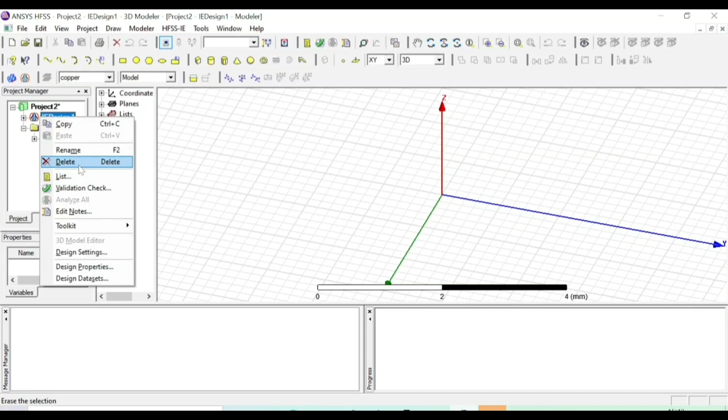We are going to the IE design, which is nothing but can also include some other designing as well. I will not discuss this at present, but this is a little bit advanced topic which I will talk about in a future video. For now, let us start with the normal topic only. Just select this and go to Insert HFSS Design, and a normal thing will appear.

By default, here are the different options. If you observe my previous video closely, you may notice all these tools are in a different order. That's because the main flexibility is that this is the standard order, but you can even change it.

For example, let's say I want this bar at the end. I will select this black line and move it there. That's not all - if I want it placed horizontally, I can do that too. Now let me get it back to how it was.

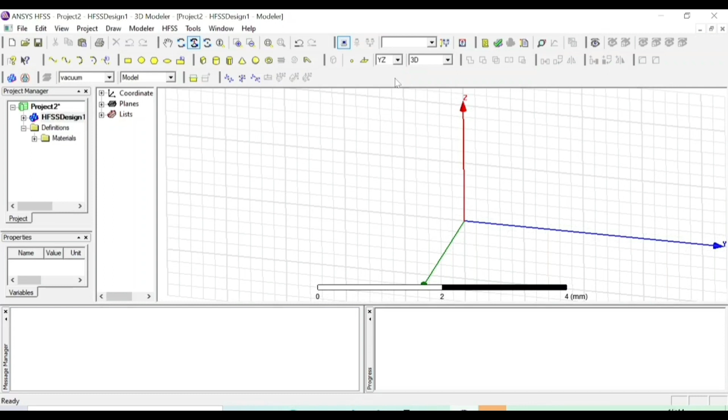As this is in the XY plane, let's say I don't want to design in the XY plane - I want to design in YZ. Just go here and select YZ, and now your base plane will be YZ. If I want the ZX plane, I can use that too. By default, let us keep it in the XY plane.

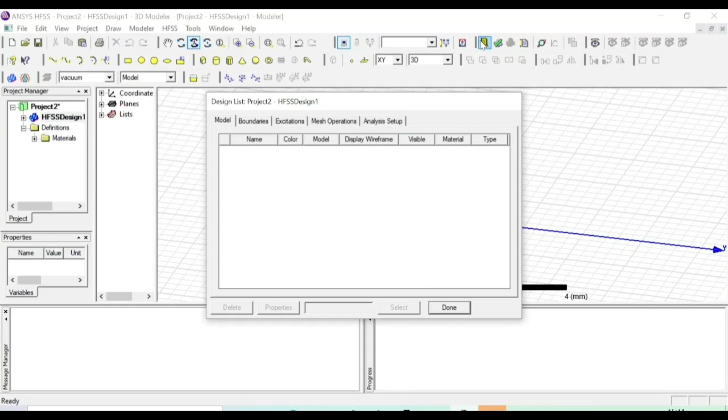Now here there are some things. This is 'list all', which shows all the different kinds of components we use in an antenna, like the ground plane, the substrate, etc. - all of that will be displayed here. This is the validation check, which you've seen me use with parameters, I will explain it afterwards. These are common options.

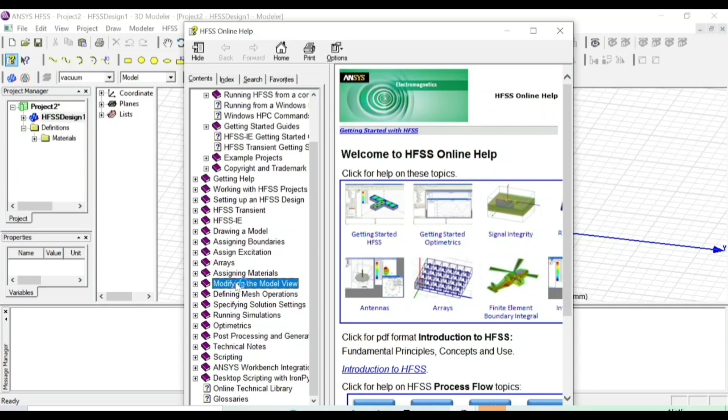Now if you come here, you'll see there's a question mark option. This is help contents - if you click it, it will give you tutorial videos. If you have time, you can open any one of them. For zooming in and out, how you can do it, you can see everything here.

If you want a particular thing, you can just click help on context, and based on that you can get it. Now next to this, these are some of the tools, like you have a line tool.

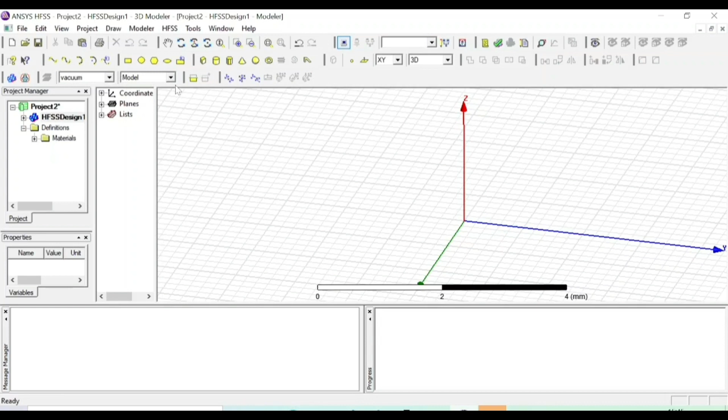Whenever you select anything and you want to deselect, just click escape and it will be deselected. Now, how you draw the rectangle: just select any rectangle. For example, if I want to draw a rectangle, select the starting point, drag it and place it like this.

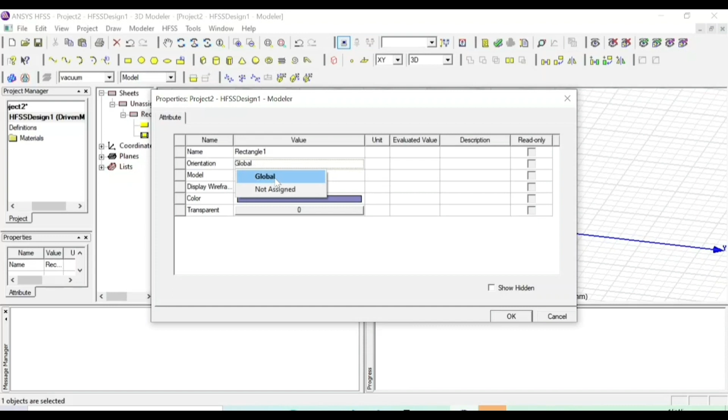Now here it will be displayed. When you double click, you can see here. First of all, it is global. You can leave it as here, or if you want, you can change the name also.

Let me say it as plane 1, let's say. And if you want, you can change the color also.

You have some of the basic colors here. Otherwise, you can select, suppose let us say blue. Then you can select the contrast, how much should be saturated, how much should be illuminate, what is the hue number.

If you want, you can click on add custom colors. You can add your required amount of color also to your thing.

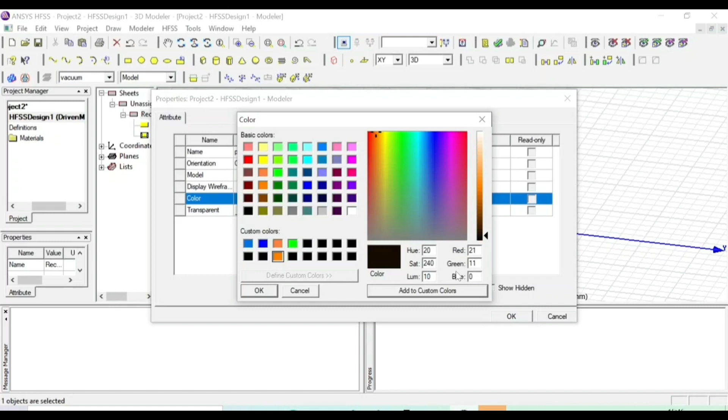Once you are selected, these are the custom colors. Let us say I want orange. Just select this. Let's say I want it to be 150. Okay, just click OK.

Now this is the thing. Now when I click OK, see the orange color is displayed.

Now let's say I want to assign some parameters to it. Just go here, go to plane. You can assign some boundary, you can assign some radiation, you can assign some finite conductivity.

If you want to add an excitation, you can do. You can add a voltage to this. Like, instead of radiation, let us say I want the wave port.

Let us say I am just connecting the supply or current to that. Then I can select the current. If you want selecting an incident wave, you can select that. You can select the different thing.

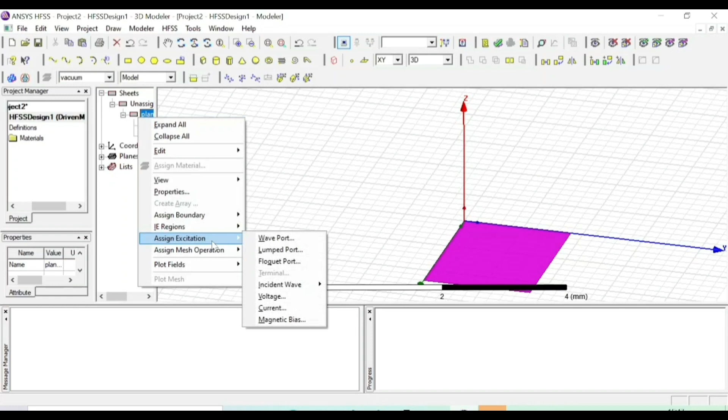Now let's say I want a wave port. Just I will click wave port. Leave the name as default, or if you want, you can change it. Click more, and in the integration line, you can select a new line.

Then by default, whenever you are at the center, you select this. And let's say I want till here, it will be the thing. Then let's click next, click finish.

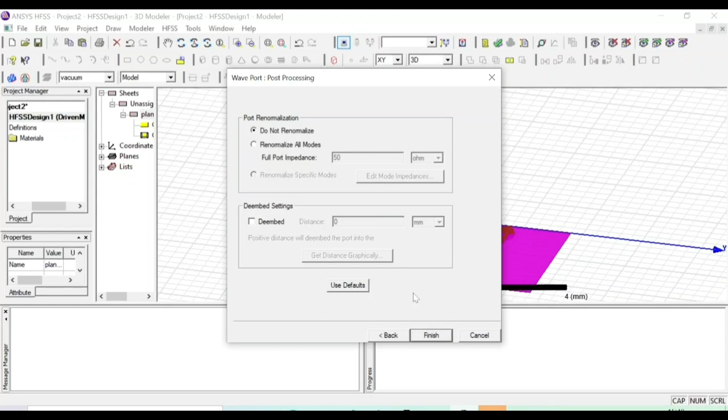Now if you want to see this, just go to here, like press on it, Excitation. See, it will show you the direction. Now by default, whenever it's on, it will be inside. If you want, you can see that. That's the beauty of this.

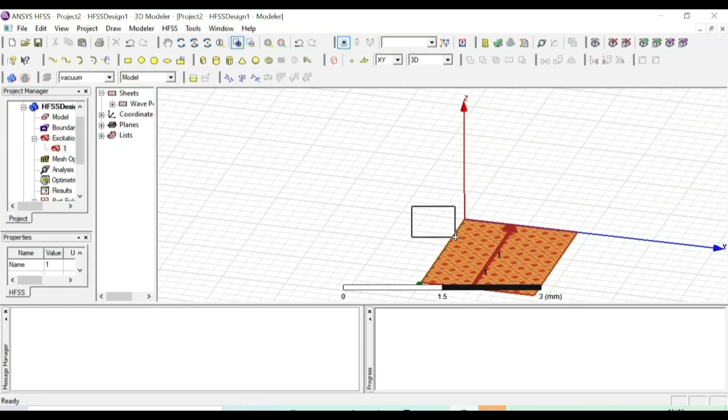Now let's say I want to zoom in. Just click on it, and if I draw like this, it will zoom in. Let's say I want to zoom out. Just click in, you can zoom out.

Now these are the common functions. I hope friends you are gaining a good understanding about the different features.

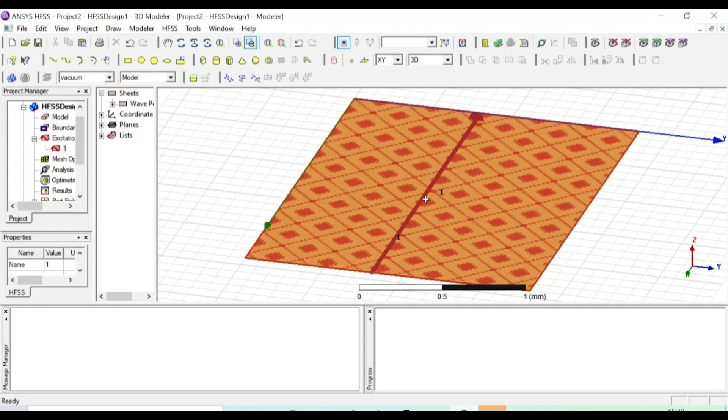Now let me show you how you can create a transparent boundary. Let us say I want to delete this. Just go here, I select this, go to edit, and click delete if you want to delete that. Now yeah, this is the thing.

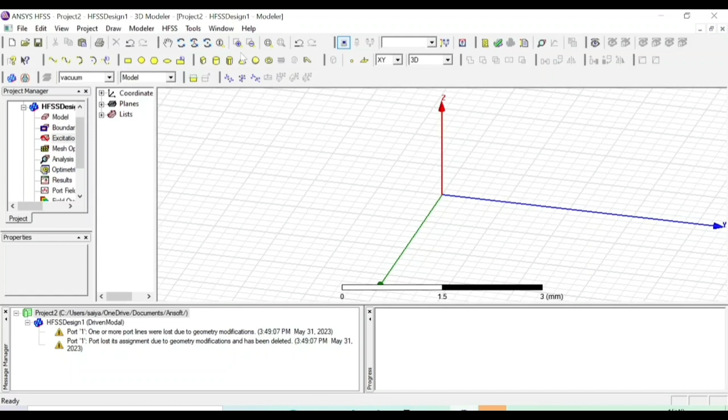Now let's say I have created a cuboid like this. Whenever you are drawing any shape, you should always take care that all its vertices, all its sides should have some finite value. It cannot be zero.

Now let's say I want this box to be transparent. Just go to box, right click on it. This window will appear. Here, if you want, you can select the word.

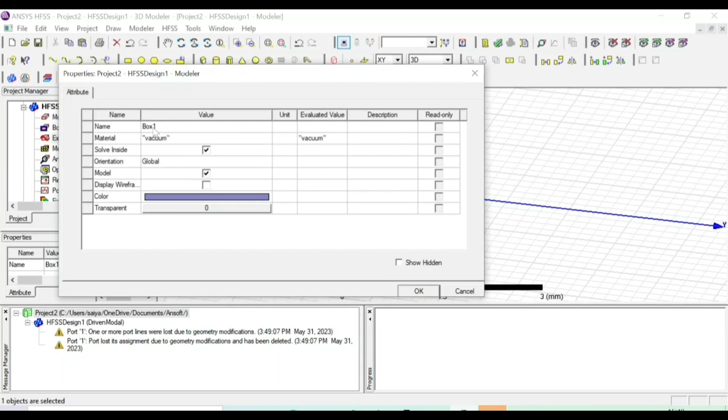If you want to select the material, you can just say edit. You have a ton of different options. Based on your requirement, you can select.

If your substrate is sea water or fresh water, you can select fresh water. If it's tungsten, you can select tungsten. If the common is copper, if you want, you can say copper also. In copper also, you can select this. Just click OK.

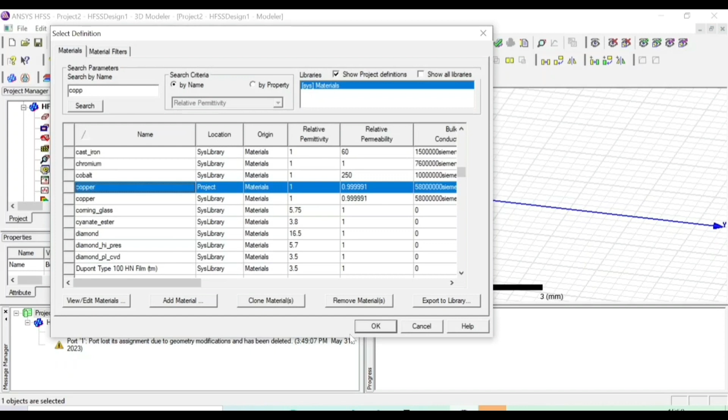Just as you want, you can select the color. Let's say orange. Now the transparency is very important. See, at present it is fully opaque. Let me increase the transparency to 0.4.

Okay, let's say I want the transparency. The moment I am changing the border, you can see how transparent it is. If you want the media to be very transparent, select 0.9 or above. If it is 1, it will be fully transparent. If you want it fully opaque, keep the dial to 0. This transparent parameter takes values from 0 to 1.

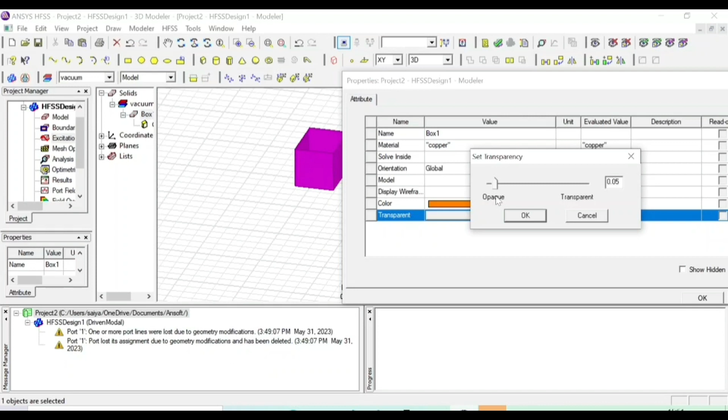Let's say this is fully opaque. Let's say I want a little bit of transparency. The moment I go towards 1, you see the box becoming more and more transparent. Let's say this is the transparency I want. Just click OK, then click OK again. See, the moment I deselected, you see it very transparently.

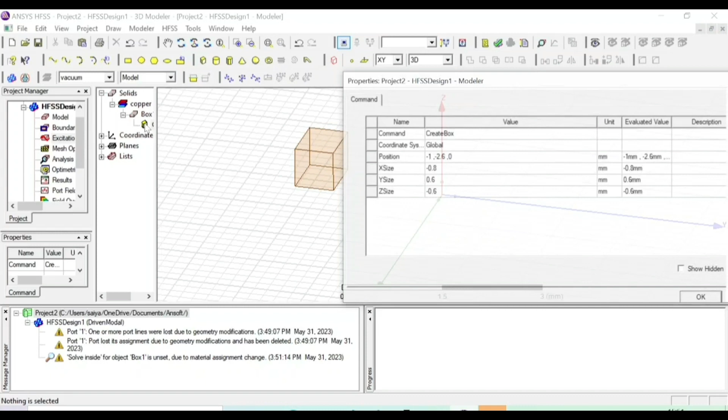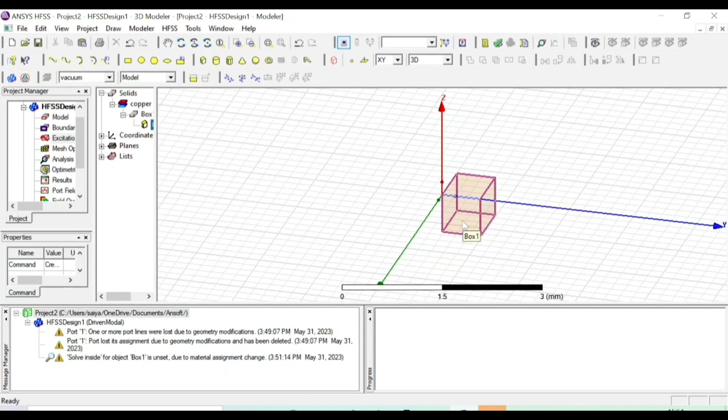Now if I want to change the coordinates, just go here. Select create box. Here is the position at which it is. Let's say I want this starting position to be 0, 0, 0. Just click OK. See, its starting position is at 0, 0, 0.

Now let's say I want the x size to be 10, y size to be 40, and z size to be 3.65. Click OK. You can create very precise movements, with 0.05 accuracy also you can achieve.

Now you may ask, this is all good that you created this box, but how can I verify whether the box I created matches the requirement? Just go here, select the box, right click on it, then go to measure. If you want to measure the position, just go to position.

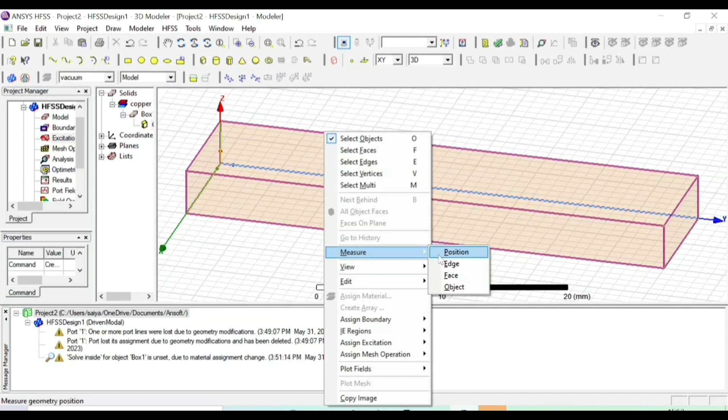See, this is the first position. You can see the first position vertices is 10, 0, 3.65. As I have kept the border position, let's say I want to measure up to here. You can see position 2. What is the total length? 3.65, that's what I kept in the Z axis.

Now I want to measure in y. You can see the y distance is 40, and let's measure the z also. Now this is the x direction, you can see it's 10. The main thing is that it will also produce the accuracy.

Let's say I want to measure the whole side as one. Just go here, right click on it, go to measure. Instead of position, go to edge. Select the edge which you want to measure. It will show you the length of that edge. This is the length.

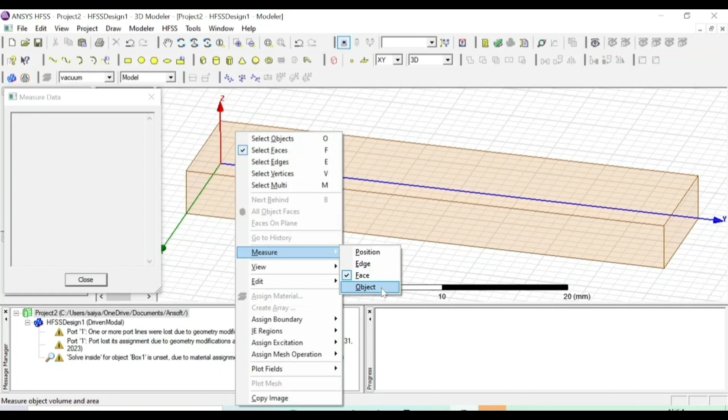Now let's say I want to measure the whole object instead. Just select the object and click. It will show you the total number of faces and co-edges it's having.

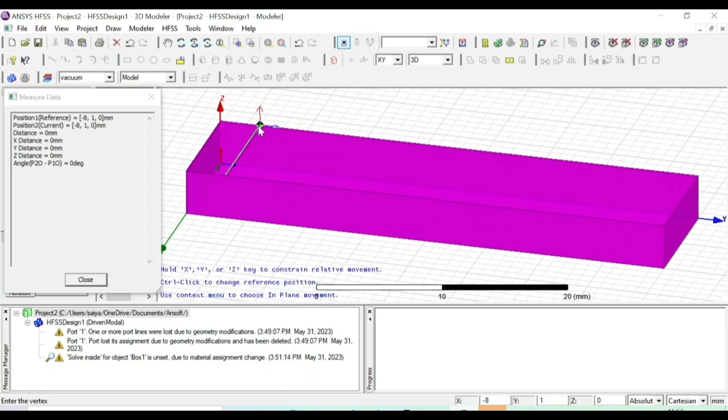Draw line, go from here. I want it to be here. Let's go here. And once done like this, you can just press escape.

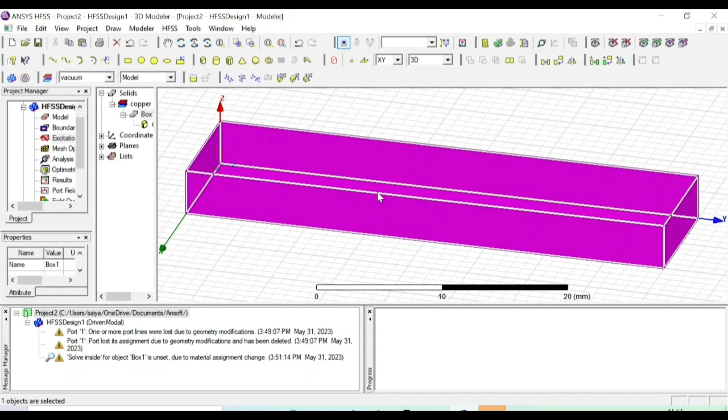Okay, wait a minute, I didn't get here. From here, let's say up to here, let's draw it here. Then once you go here, just click escape. I'll come back to that a little bit later.

Let's say that I have drawn a spiral like this. You should be very careful. Let's say I draw one sphere like this.

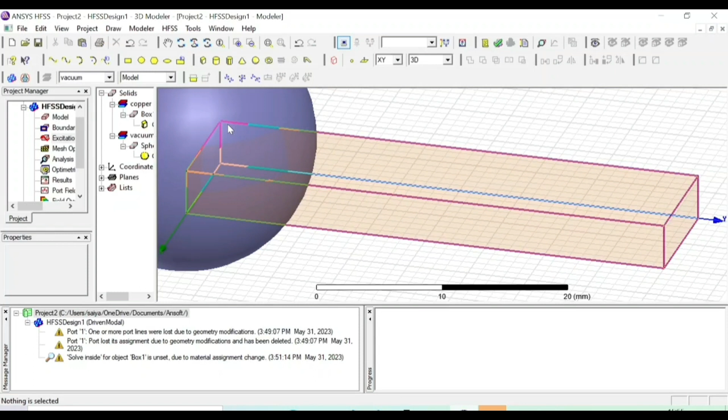Now I want to add both of them, for further simplicity. Let's select, I want to just merge both of them. Go to here, select the sphere, select the box, click here. The moment you select two objects, these options will be highlighted: box, sphere. This is unite, just click on unite. Now both will be combined, not different.

If you press Ctrl Z, it will be split. Let's say I want to subtract. Go to subtract. Now if both are connecting and you want the part of the box removed, just select box and click OK. See, that part of the box will be removed.

Let's say I want the sphere to remain, but the part where this rectangular box is touching, that part of the sphere I want to remove. Just go and select both of them.

Select both the objects and go to subtract. Just select ball and click OK. Now see, in the ball we have that required thing. This is very much useful whenever we are drawing some complex designing.

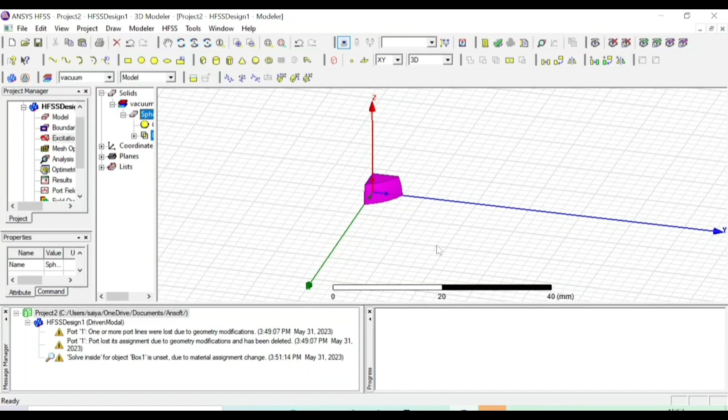Now select both of them, and this option is intersect. If you want to keep only the part that is being intersected and remove the other part, you can click on intersect. It will keep only that part. Let's say I don't want to intersect.

I want to split. Just click on this. It will ask you by what plane if you want. If I say XY plane, keep the fragments. Now you can split it with the help of this. If you split the entire selection, you can split wherever the split plane is crossing.

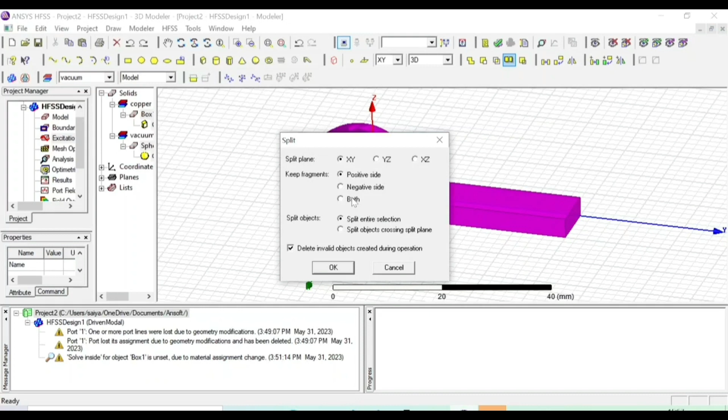Only the part you want, you can split that also. You can split both negative side and positive side. You can split the YZ plane. Let's say first XY plane and click OK. See, now for further clarity, let me show you.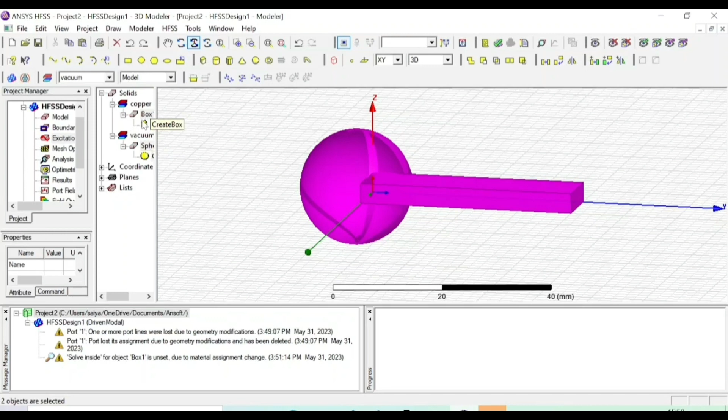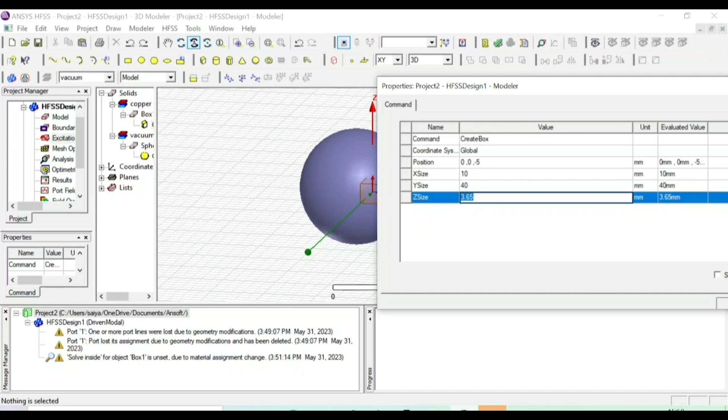Okay, let's do one thing. To give you more clarity, let me extend this box here. Just go to box, create box. Let's say for Z, the value is not starting at zero, it starts at minus 5 and extends up to 5.0. Okay, click OK. This I will explain now.

Now let me select both of them and go to split. Now I want only the positive side. I select the positive side, XY is my splitting axis, whole selection. Click OK. You see, only the positive side will be left. The negative part will be cut off.

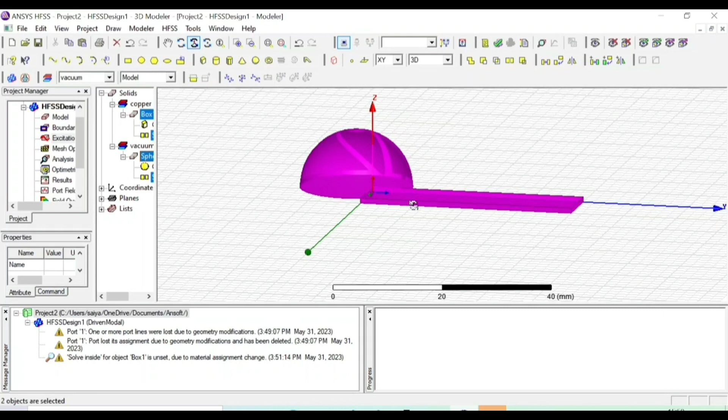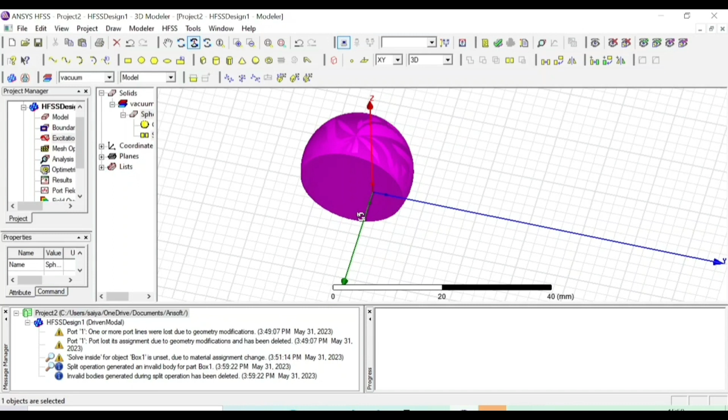Remove. Let's say I want to split, but with respect to the y-axis, and I want only the negative side to be removed. Just click OK. Now you see, whatever is on the negative side with respect to the YZ plane is removed. Now let me grow it back.

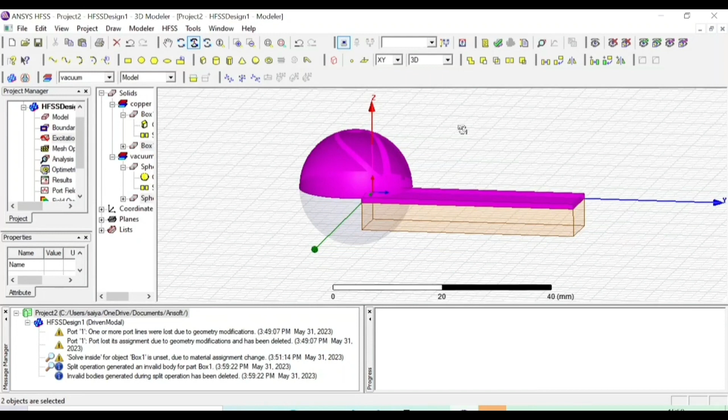Now again go to split. Let's keep it in here. Let's say I want both sides, and I only want to split the objects at the crossing plane. Select this, click OK. See, you can see the positive side is separated, the negative side is separated, and it is separated by a plane. At the collective plane, it is separated.

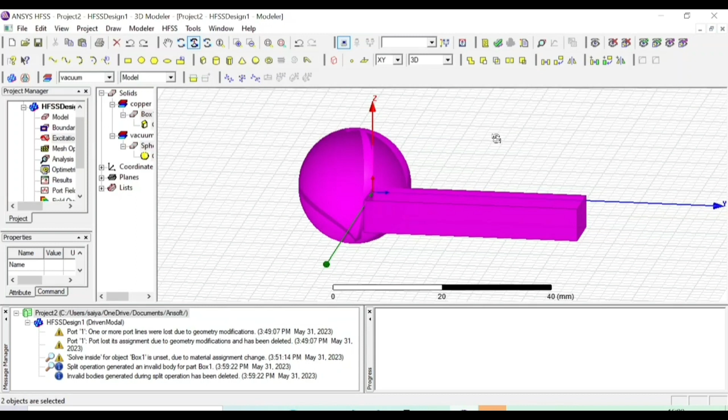So that's a different thing. Now, I hope friends you have gained a good understanding and a good idea about the different types of basic operations that we perform when we are designing any kind of antenna. If you have any doubt, please feel free to comment that down below. So friends, now I hope you have gained a good idea about the HFSS software. Now let us move forward.

Now as I told you, I will explain about the line tool. So just say I want to create a line. Just draw something. Only while using the line tool, you should be careful that whatever you draw, it should be a closed figure. Once you get it, you need to click enter and then escape.

Let's say I want to draw one line like this, and this is the thing. Once it is done, see, you always remember this. Whenever you are using the polyline tool, whatever lines you draw, it should always form one closed figure. If it is not forming any closed figure, you will never get that. You should be very careful about that.

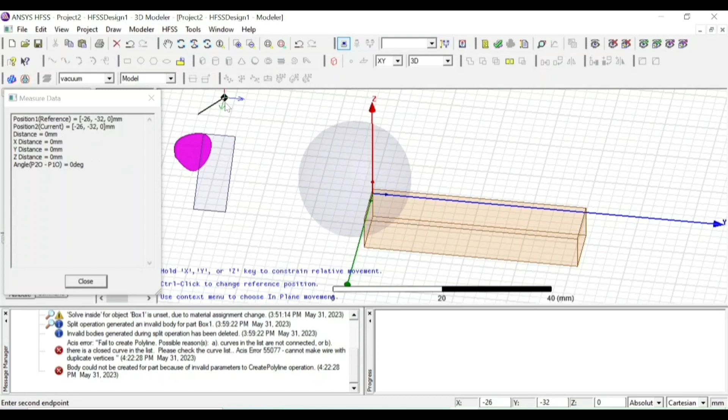Now let's say I want, this is a special type, and if you want some curve kind of thing also, you can draw that. Okay, let's say I want to draw a 3-point arc. If you want any arc like this, you can draw it. Let's see, this is the arc I want.

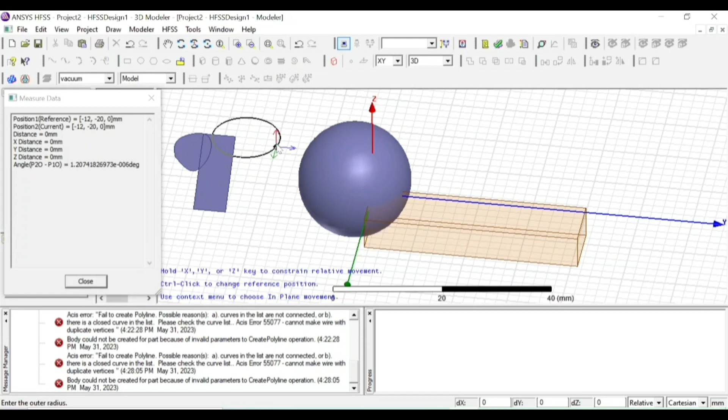So that's it. If you want to draw any arc, you can draw it. If you want any arc with a center point, you can draw it. Let's say if you want to create a ring, you can create it like this, with the inner circle radius and outer circle radius. Just click XZ and you can see it.

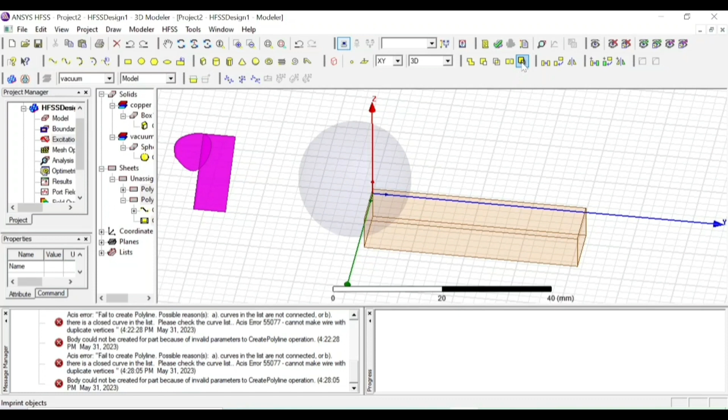Now if I want to merge both of them, select both of them and click split. I have explained about unite, subtract, intersect and split. Let's see what imprint does. If I select the polyline tool and click OK, see, that polyline will be getting imprinted. Let's say I want to imprint on this curved pattern. I want this, so select both of them, go to imprint and select polyline tool.

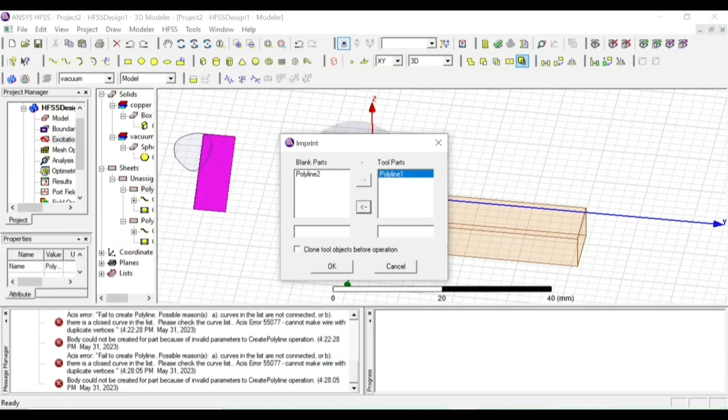You see, it will get imprinted. Let's say I want the polyline to get imprinted like this. Okay, you can change what kind you want to be imprinted. Click OK, so that's it. Next is move. If you want to move any particular object, you can move it here.

Let's say move, and if I click here... Control Z, yeah. Let's say I want to move this little bit here. Just select that object, click on move. From here, let's say I want it to be here. You can move it.

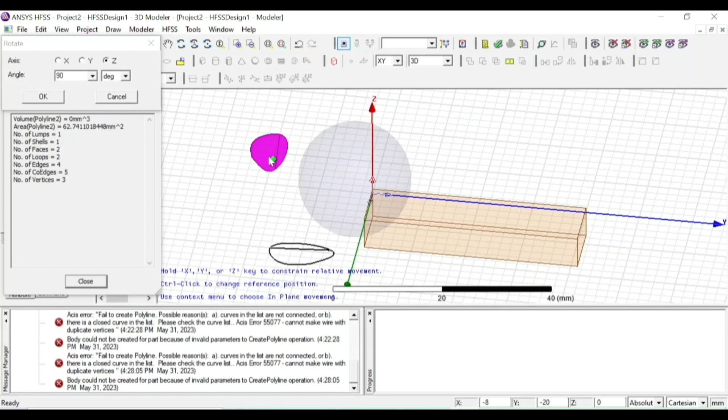Let's say I want to change its axis. I can change that. I want it to be in y-axis. I can change that, or x-axis. It is already in z-axis. I want to change angle.

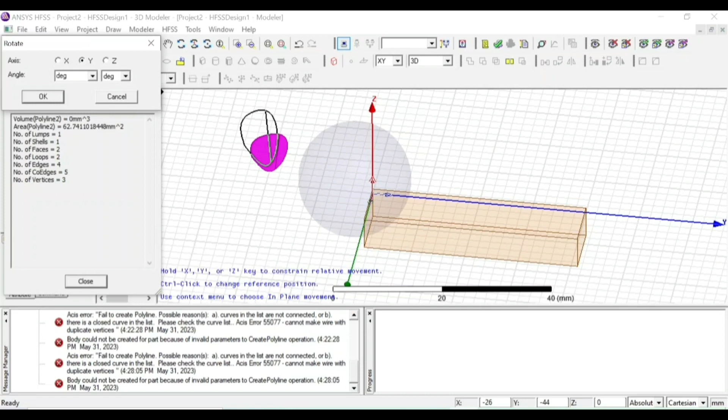You can change it. I want it to be in y-axis, and let's say I want 89 degrees. You can create it at y-axis at 89 degrees. You can create it.

I want it to be like this. I want it to be symmetric on this side. I can take the symmetry also. I want to duplicate it around the axis.

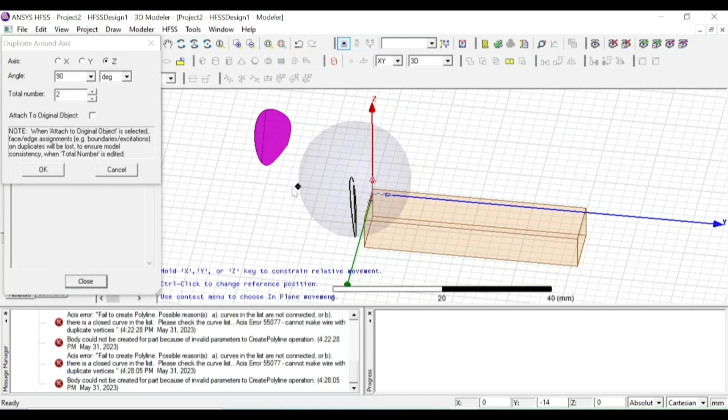I want along this axis, I want to duplicate. I can duplicate, and you can select how many number of duplicates I want. Let's say I want 5.

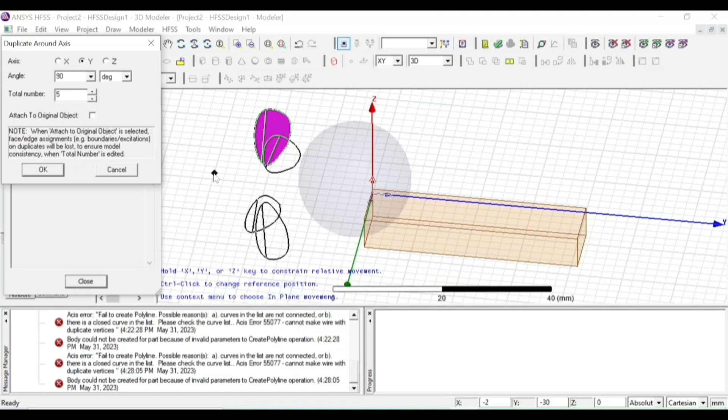Around the Z, I want along it to be y-axis. I can select along x-axis also, or you can select along y-axis and click OK. See, along y-axis you have the 5 duplicates.

So these are some of the important concepts, or some of the common tools which will be used to design any kind of antenna, or any kind of waveguide, or any kind of radiation pattern also. I hope you have gained a good understanding about this.

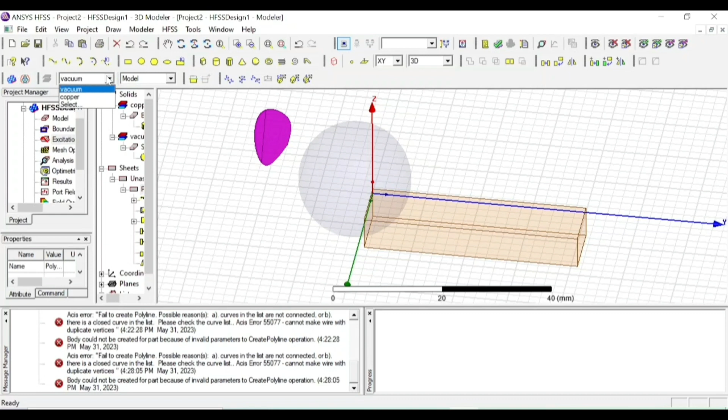Now let's say if I am creating the design in vacuum. Let's say I want to create this design in some copper. Just say copper. Now the overall area where this empty space will be in copper material. If you want, you can select any kind of copper material also, that's not a big issue. Let's keep it in

normal vacuum. So I hope, friends, you have gained a good understanding about this topic.

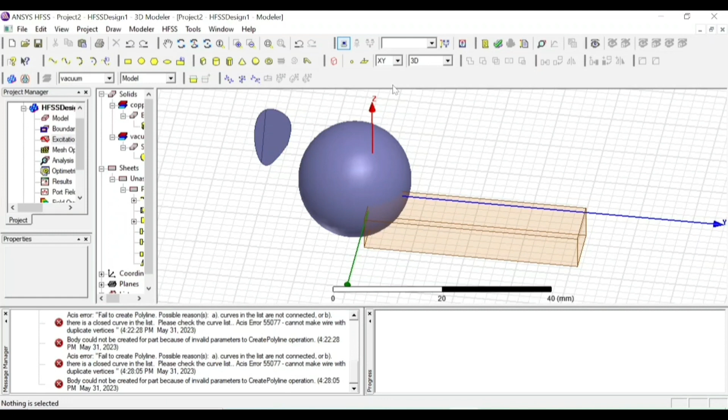Let's say once you have created this, you want to save this, just click on this button icon here. It will save it. It will ask you to select the location and click save, and it will save that file.